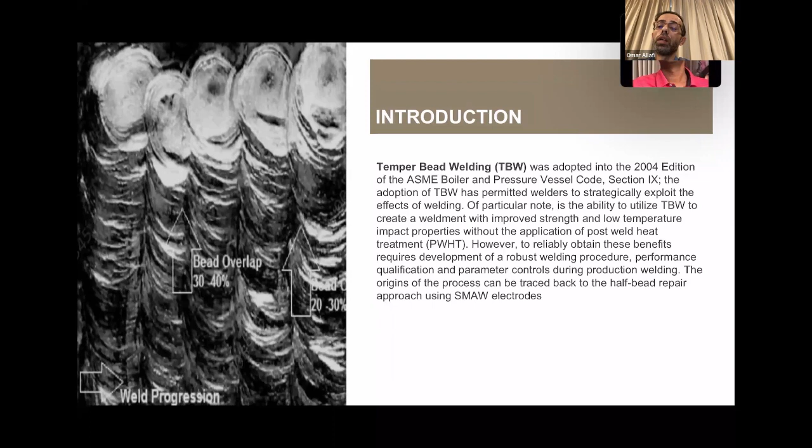As an introduction, the intent of temper bead is to control the mechanical properties of a weld joint and heat affected zone without the need for heat treatment. So it provides the same mechanical properties as heat treatment. This technique was adopted in 2004 in ASME Section 9, but that doesn't mean it was not in use long before this date. We have a record of using temper bead welding since the 1980s, especially in nuclear plants where accessibility is a concern. The first technique used in the 1980s was the half bead repair using SMAW electrode.

So how did it come to existence? If you look at the difference between single pass and multi-pass welding, we notice that residual stresses are much less in multi-pass welding than single pass. This is in part because the small welding filler size used in multi-pass joints will temper and normalize the weld and base metal, and also refine the grain size of the heat affected zone.

As you can see here, this is a weld joint welded using a small filler of 3.25 mm, and the white area is the recrystallized area, where this area is affected and tempered by the subsequent weld runs. But here, the white area is much less, so tempering and refining is not that effective.

In addition to this, the small electrode size will result in a smaller heat affected zone, as shown here. So this is how temper bead came to existence.

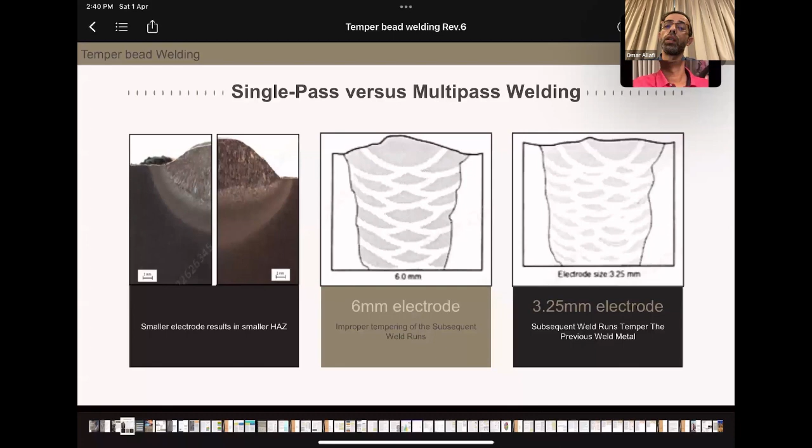So they asked: can we set forth critical parameters to control the mechanical properties by applying the subsequent run, ensuring that the hardness and toughness don't exceed the limits in the base metal? So this is where it started, and it started, as I said earlier, with the half bead approach.

So when it comes to PWHT, I always ask this question: what is wrong with PWHT? We don't tend to look for an alternative to PWHT when we are manufacturing or fabricating a new vessel. Yes, we don't do this.

So applying PWHT becomes a concern when you don't have time to do it. This is applicable when you are in a shutdown or a turnaround, or sometimes you don't have accessibility. So time here is the main concern. Give me time - all people in the inspection field or welding field know that if you give me time, I can give you everything. So the most critical factor that governs the repair methodology is time.

And we know that PWHT is time consuming. In addition to this, it's not always practical, and can itself result in distortion or reheat cracking. So if there is a way to ensure or adjust the mechanical properties of the base metal and heat affected zone without the need for PWHT, that would be great.

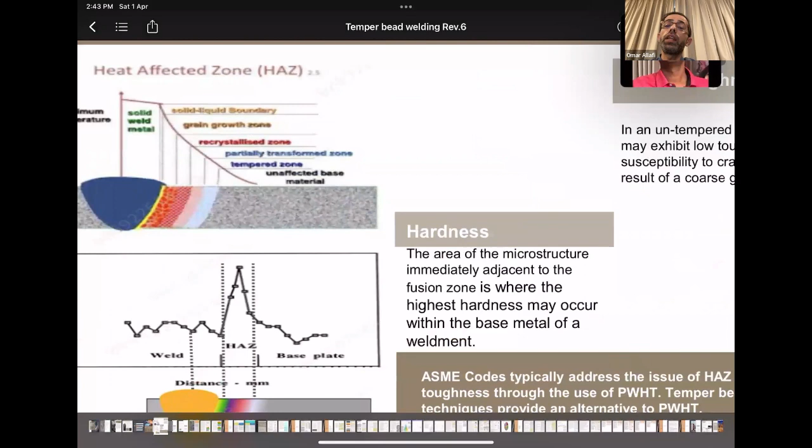It is clear in this graph that the coarsened grain area is adjacent to the fusion line of the weld because of welding. This is because it goes above the critical transformation temperature, and a phase change occurs from ferrite to austenite. Upon cooling, martensite will form, and upon heating, the grain size will enlarge. So this increase in grain size will affect the toughness, and the fast cooling or formation of martensite can result in high hardness values.

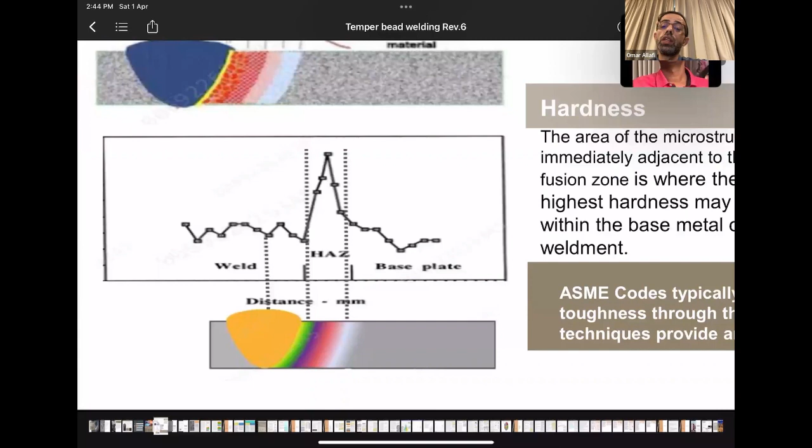As we can see here, this is where the maximum hardness can occur, just near the fusion line of the weld. So ASME codes address this issue and restore the mechanical properties through PWHT. So can temper bead do this? And the answer, as we'll see, is yes.

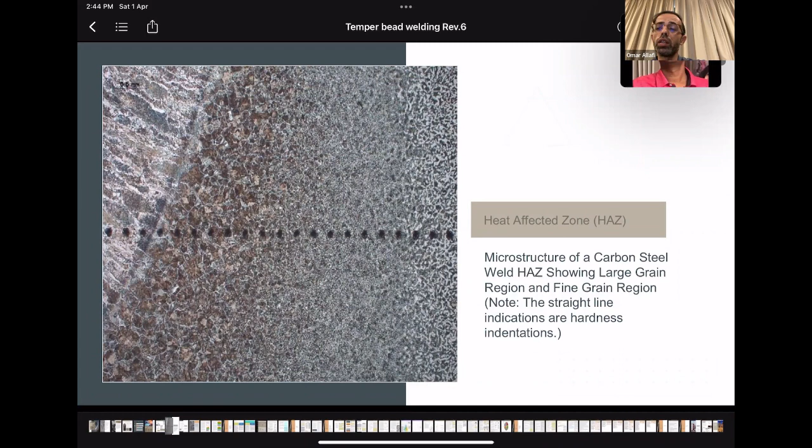This is another photo of the coarsened grain area. It is clear - this photo is for carbon steel welded using high heat input. So this is the reason why the grain gets coarsened or enlarged near the weld toe. And this dashed line is for the hardness indentation.

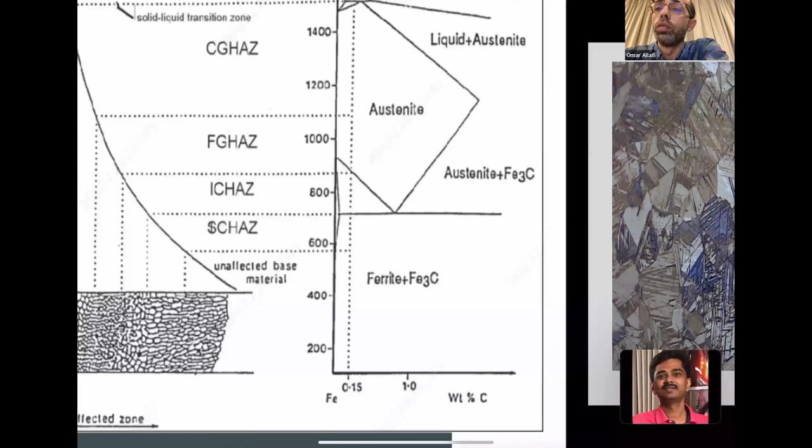Okay, so this is the relationship between the peak metal temperature of a weld and its correlation to the iron carbide phase diagram. In this area, this is where the grain gets coarsened, where you have enlargement in the grain size, because of heating during welding.

This is the fine grain heat affected zone. This is the intercritical, where the temperature goes up above the transformation temperature, or this line. This line here is referred to as AC1, the lower critical temperature, which is around 745 degrees Celsius.

So this area is where tempering occurs, where we get the mechanical properties restored. What we need to do is to make this area similar to the tempered area or subcritical heat affected zone, where the grain size is tempered, the toughness is restored, and hardness is similar to the unaffected base material.

Mr. Malge, can you please unmute yourself? Okay. Sorry for the disturbance, I'll just check on it. It's okay, it's fine. Even Omar, can you mute everyone? I don't know who's speaking, but it's okay, as long as you can hear me, it's fine.

So coming to the metallurgy of temper bead, the portion of the heat affected zone that exceeds the lower transformation temperature is subject to formation of non-equilibrium cooled microstructure upon cooling. So when you have slow cooling, this produces ferrite and carbide, which is fine and okay.

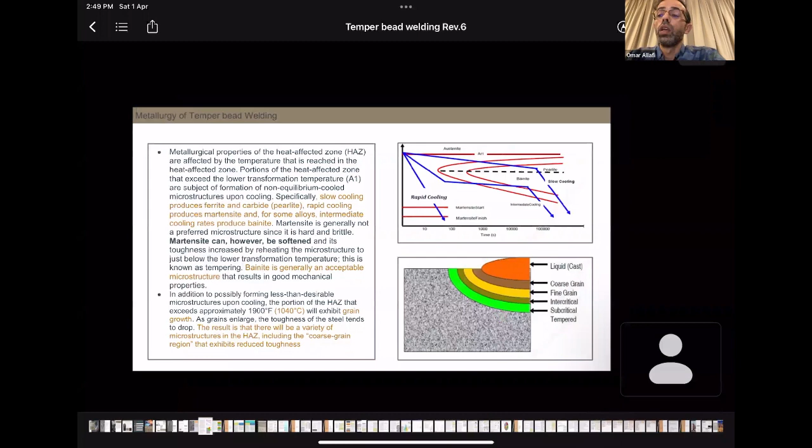So as I said, the essence of temper bead is to temper the previous weld by applying a new weld run, so you need an overlap. What we are doing is controlling some parameters when applying a weld run over a previous weld. This new weld run will temper the previous weld and the heat affected zone as well, so mechanical properties will be restored, hardness will be reduced, and toughness will be within acceptable limits.

Types of temper bead: as I said earlier, the first temper bead type used was half bead weld repair using SMAW. This technique was used by SMAW electrode. The procedure included preheating before grinding the defect or starting the welding, then grinding, then you use a small electrode for buttering the weld.

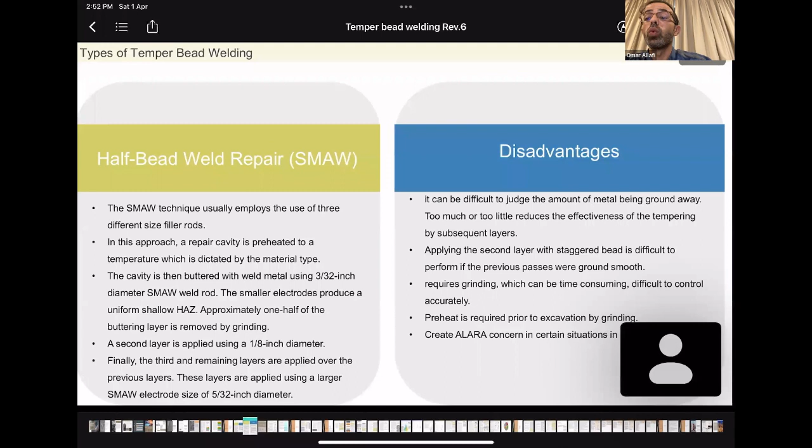Preheat is required to excavate by grinding. So before excavating the defect, you have to do preheat, and this creates an ALARA concern in certain situations, like in a nuclear plant. ALARA refers to as low as reasonably achievable. This is well known to all people dealing with radioactive sources or working in a nuclear plant.

So this will increase the exposure time to radiation when you are doing this much of grinding and for the weld beads you apply.

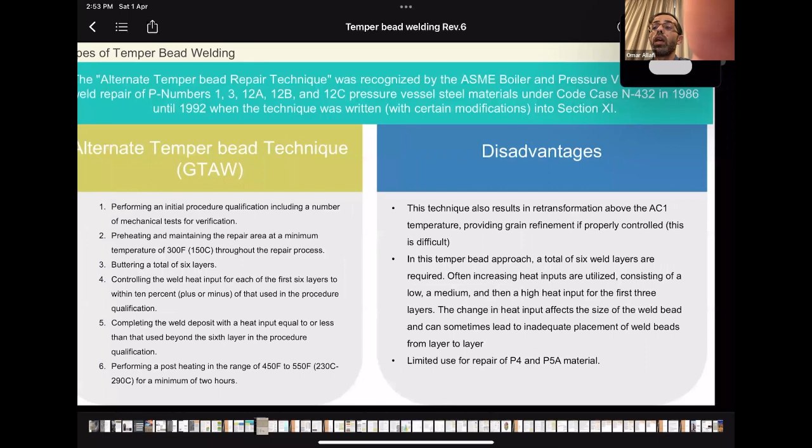And in 1986, a new temper bead technique was developed, which is the alternate temper bead repair technique. It was called alternate because it was an alternative to the well-known half bead technique. It was recognized by ASME through a code case for P number 1 and 3, 12A, 12B, and 12C under the code case N 432, from 1986 until 1992.

This technique was used extensively between 1986 and 1992 because there is no preheat used during the grinding, and there is no grinding of the weld bead, and requires less preheat during welding. So these are the main advantages of this technique.

You can apply it by preheating the repair area to 150, buttering a total of 6 layers. In each layer, you are increasing the heat input for the first three layers. You use a higher heat input in the second layer than the first one, and again a higher heat input for the third layer compared to the first and second layer.

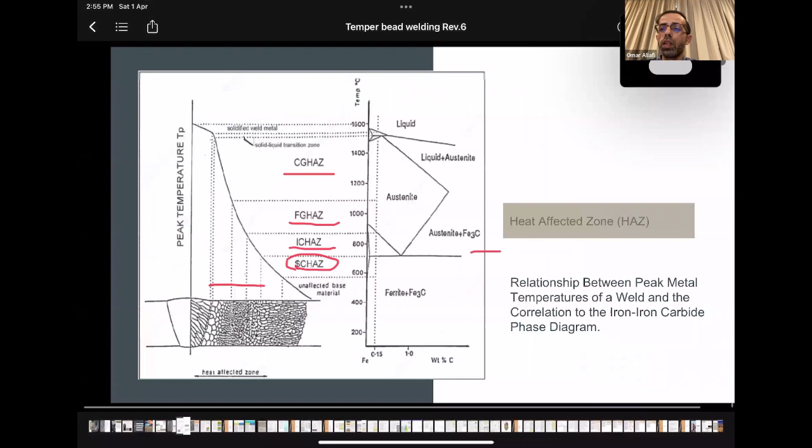This will result in increasing the temperature of the base metal above the lower critical temperature. This is AC1 - I can go back to the chart just to show you this is the temperature I'm talking about, the lower critical temperature. I'll be using this critical temperature in my presentation, and I'll refer to it as AC1 critical temperature.

This will take the base metal temperature above this lower critical temperature, and upon cooling, transformation to martensite and bainite will occur. This will enhance the toughness and reduce a little bit the hardness, but it's limited. It has limited use for P number 4 and P5A material, P11 and P22 material.

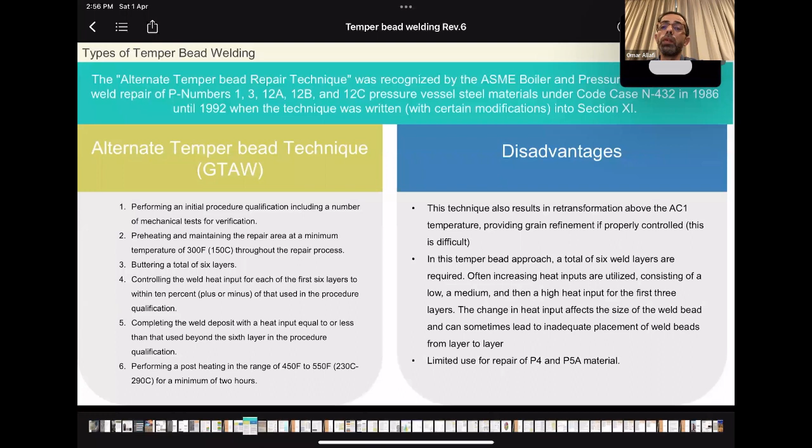So the main concern is that this technique results in retransformation above AC1.

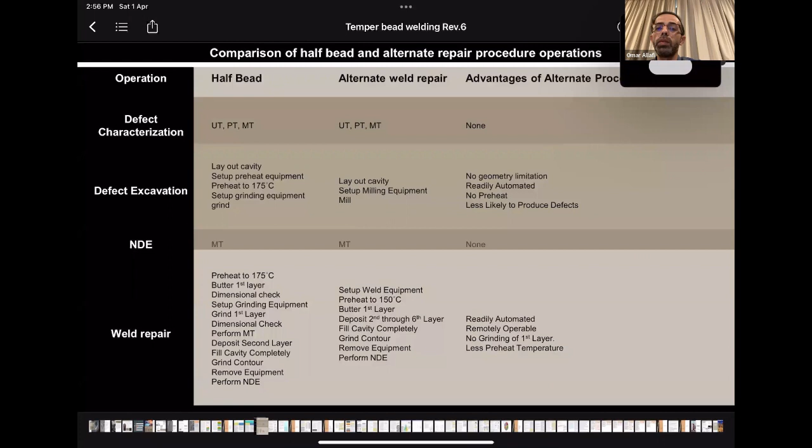This is a comparison between half bead and alternate repair procedure operation. As we can see, the advantages of alternate procedure over half bead procedure: no geometry limitation, readily automated. Of course, the technique used in this method is automatic GTAW or TIG welding, no preheat, and less likely to produce defects. So it is better than SMAW, and remotely operated, no grinding of the first layer, and less preheat temperature.

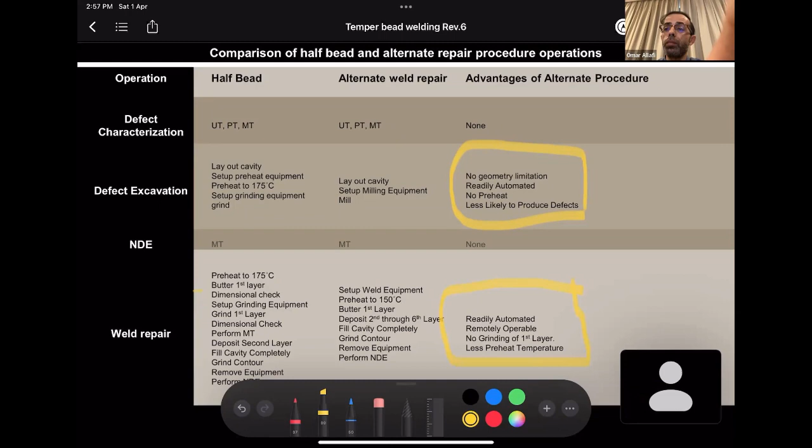Another technique was developed, which is the consistent layer temper bead technique using automated GTAW or manual SMAW. The good thing in this technique is that it doesn't take the base metal temperature above the lower critical temperature, which is AC1. So it is something similar to PWHT. It can restore the mechanical properties of the base metal.

Similar to PWHT. But as we can see here, when depositing the second weld layer, the fusion zone and heat-affected zone height of weld layer 2 is such that it is always less than the combined weld layer. So this is the weld bead, the weld layer of weld layer 2's fusion zone, and heat-affected zone height of weld layer 2 is always less than the combined weld layer.

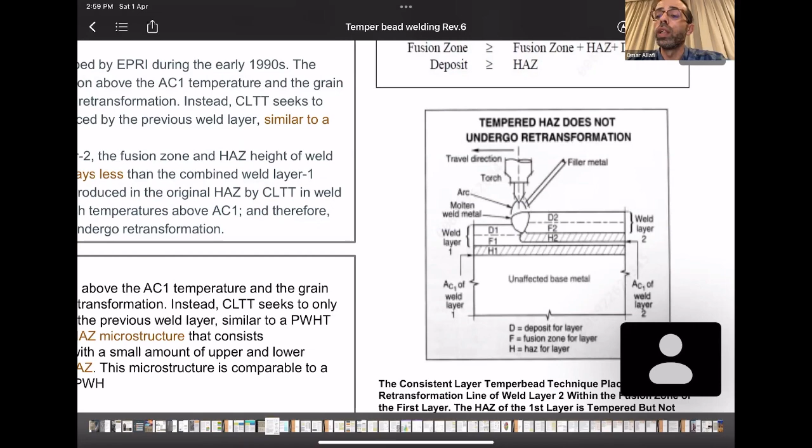So this is an overlapping - this is nothing but overlapping. This is how they control the tempering effect and control the mechanical properties of the base metal, by overlapping using, as I said, GTAW or SMAW. So the advantages of this technique are that it avoids transformation above AC1 temperature and produces a tempered microstructure similar to what is produced or achieved by PWHT.

Then the controlled deposition technique. This is one of the famous techniques that's still in use to this day. This can eliminate the coarse grain region within the HAZ where creep and reheat cracking have presented problems at elevated temperatures. So in this technique, again, you are controlling the heat input and heat input ratio, and you have an overlap percentage between the weld layers of 50% between the weld rings.

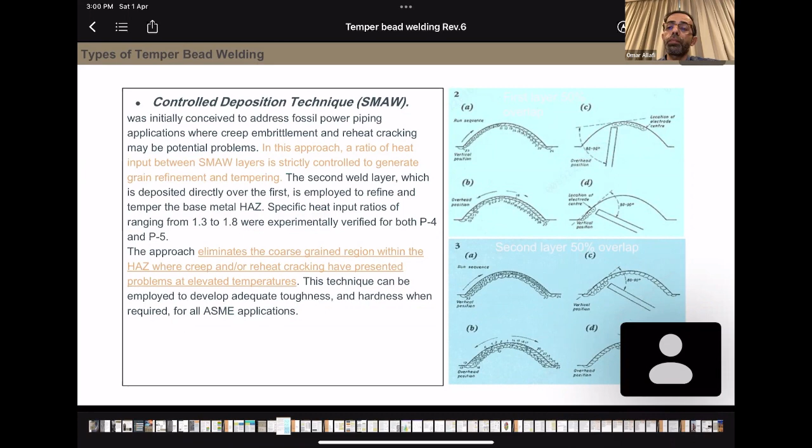So the differences between the current requirement and the requirements of the 2004 edition - we'll see how it was adopted for the first time in ASME Section 9 in 2004.

This is the famous table for temper bead, which is QW 290.4. This is where the essential variables are listed. And what I want to emphasize here is that these variables listed in this table apply in addition to the variables applicable for the processes qualified as given in QW 250.

What that means is that if you're using SMAW, for example, for temper bead, you have QW 250, the essential variables, supplementary essential variables in QW 250 - those variables are also applicable. So not only this table, and I'll explain why, and I'll show you why this is important. These essential variables, in addition to the essential variables in QW 250, are required and mandatory to be followed.

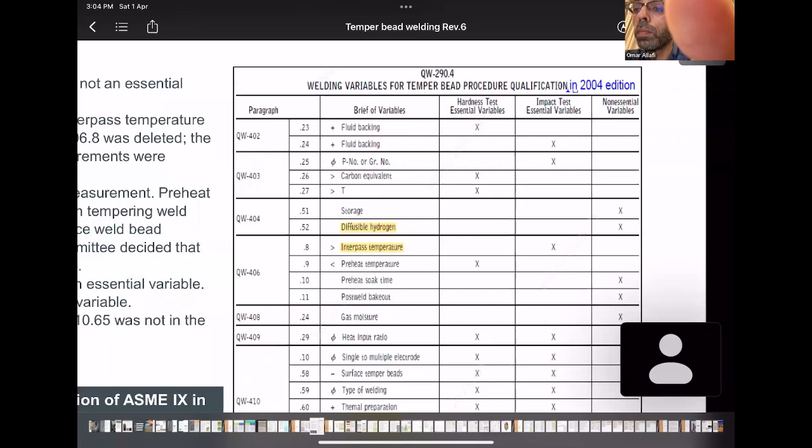Diffusible hydrogen was not an essential variable, as we can see, whereas it has become an essential variable in the 2021 edition.

And the other thing is the requirement for measuring interpass, as I said earlier, was deleted. Similar to interpass, the preheat temperature of each layer was also deleted. That doesn't mean, of course, that preheat is not required, but there was an additional requirement to control the preheat of each pass. So this was deleted.

Surface bead placement was not an essential variable. Grinding requirement was not an essential variable. Which means that if the WPS was qualified for half bead technique, you could use it for full bead technique. So now this is not possible.

In the current edition, and grinding requirement was not in the table. So this grinding, it's not that it was not an essential variable, it was just not considered in the table. But there was a note when they shared this or adopted this: the committee of ASME Section 9, the subcommittee, was considering imposing surface bead, bead overlap, and grinding as essential variables in the next edition. And they were added in the 2006 edition.

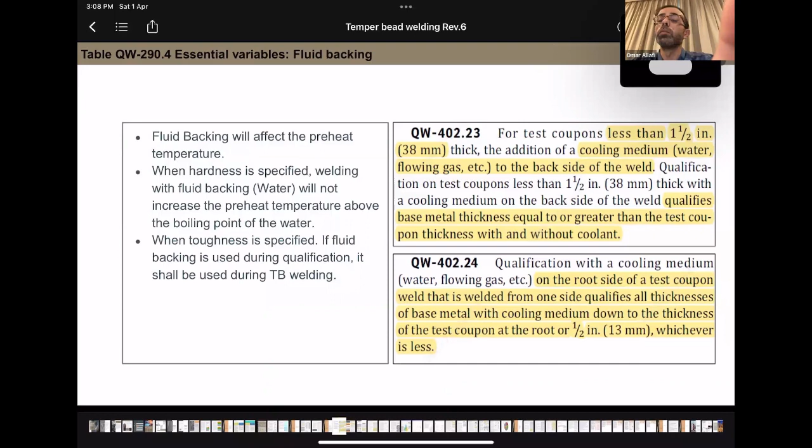So when you qualify using a cooling medium, you can be qualified for welding without a cooling medium. It's exactly the opposite when it comes to toughness. On the other side, when you are qualified by a cooling medium, you cannot do the welding without a cooling medium for that WPS.

Another essential variable is grinding. What they mean here by grinding doesn't mean that sometimes you apply the first bead and you need to do grinding or remove some surface flaws or minor flaws - that doesn't mean it's not allowed. But grinding means use or non-use of the half bead technique. So if the test coupon was qualified using grinding or the half bead technique, you cannot use the same WPS for the full bead technique.

So the thickness, this is an essential variable to hardness, not to toughness, by the way. So the maximum thickness qualified is the thickness of the test coupon, or it is unlimited if the test coupon is greater than 38.

So what we can see is that when you are welding a test coupon, your thickness is usually the maximum thickness you can use for temper bead. But when it comes to toughness, reduction of the thickness is not allowed, or there is an additional requirement for reducing the thickness to control the toughness.

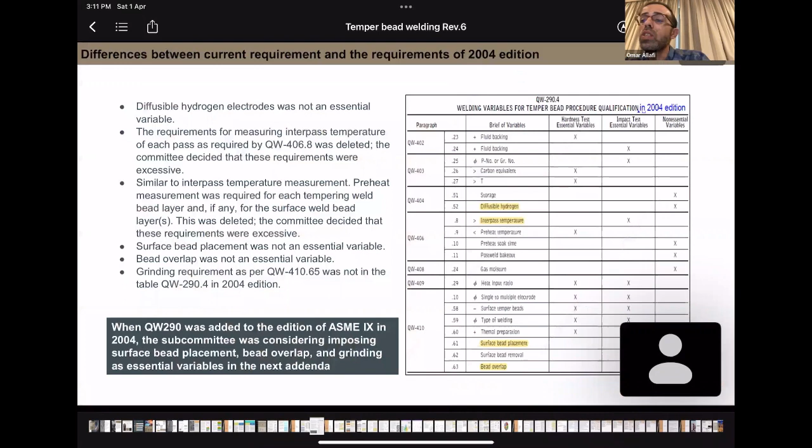This is why I would like to go here. This is why you have 3 columns: column A, column B, and column C. So what you need to know is what actually you are controlling in your welding. Is it hardness? Is it toughness? Or none of them?

So when hardness or toughness is specified in the original construction code, you have to follow column B. When it's not, and hardness is specified, you can choose column A. When none of them is specified, you can use column C.

But in this case, what you need to do, what kind of tests are required when following column C? It is the same requirement as the normal weld, which is QW451, the bend test and the tensile test. But for column B and column A, the required tests are the bend test in addition to the toughness or hardness.

So single or multiple electrode, this is a change from single electrode to multiple electrode or vice versa. When you change, you need requalification.

Surface temper bead: the deletion of surface temper bead, or change from surface temper bead that covers the full surface to that only deposited along the toes of the weld. So sometimes the placement of temper bead is placed over the full surface of the weld, or sometimes it is placed near the toes of the weld to temper this area, the heat affected zone.

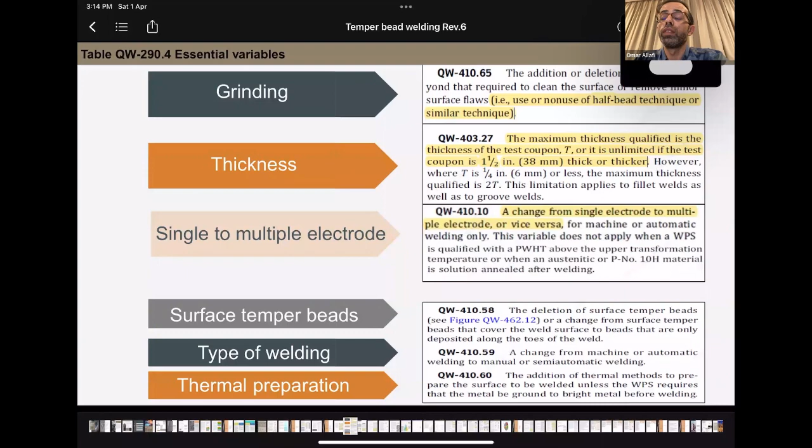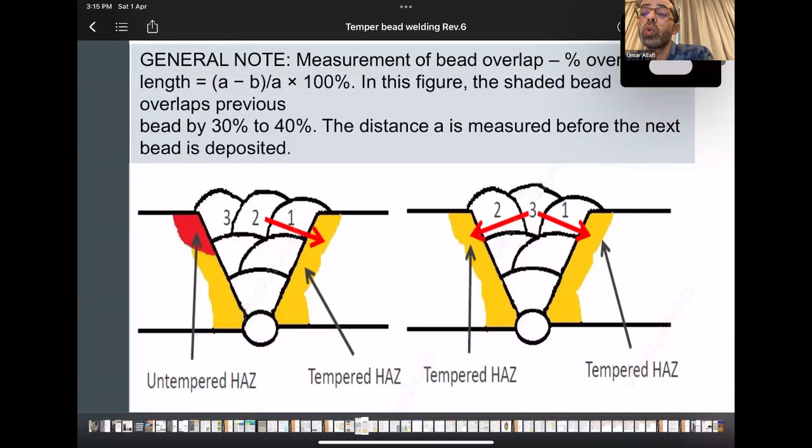But when it is done improperly, like the figure on the left side, the red zone is an untempered zone. So the sequence should be similar to this: 1, 2, and 3. And 3 is supposed to temper the heat affected zone of weld run number 1 and number 2.

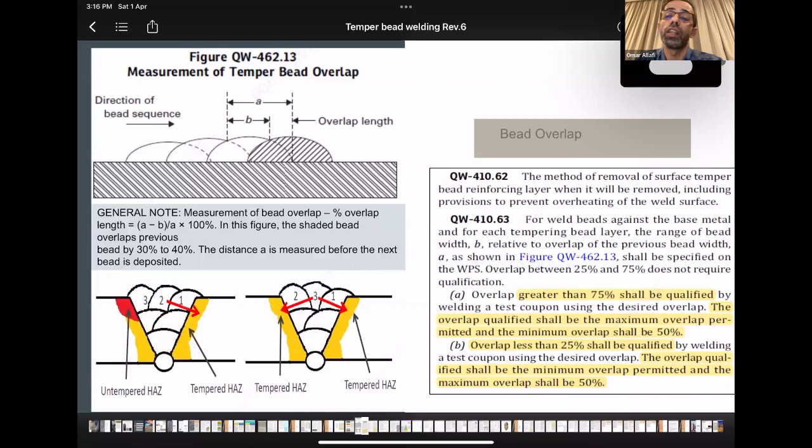And this is where skill and experience is required. This is why temper bead is very difficult. You don't need only a competent and skilled welder, but you need also experienced welders who have experience in temper bead technique.

So for the qualification, when you want to have an overlap greater than 75, what you should do now - let's say that I want to have an overlap of 80%. So now you have to...

Make an overlap of 80% in the test coupon, but that will change the minimum overlap, so it will not be within the range of 25 to 75. Now your new overlap value, which is 80, is the maximum, and the minimum is 50.

Similarly, when you are using a lesser overlap value, like less than 25, you need to have a new test coupon that matches the new overlap value. Let's say that it's 20, and your maximum overlap in this case will become 50%.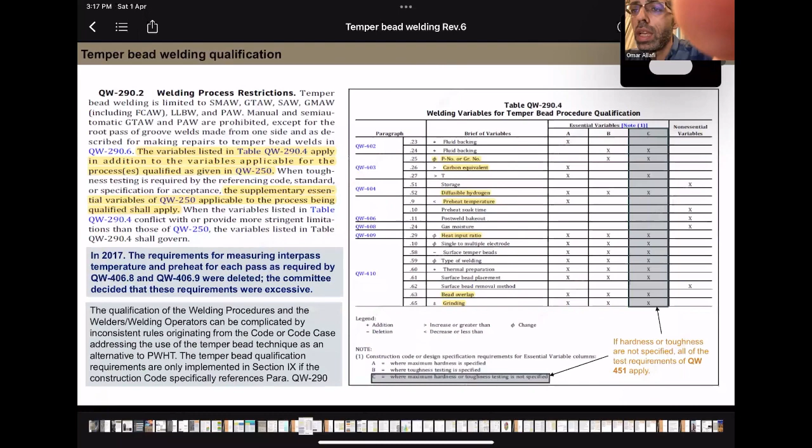P number: so I'll just go quickly and refer to this table. As you can see here, P number and group number are only essential variables when toughness is required. For column B, when toughness is required, and it is not required for hardness.

So does that mean that when hardness is specified for temper bead, the P number is not a factor? I mean, does that mean that if I qualify P22 material, I can use the same WPS for P11 and carbon half moly and normal carbon steel? The answer is no, simply because, as I said earlier, these variables listed apply in addition to the variables of QW-250.

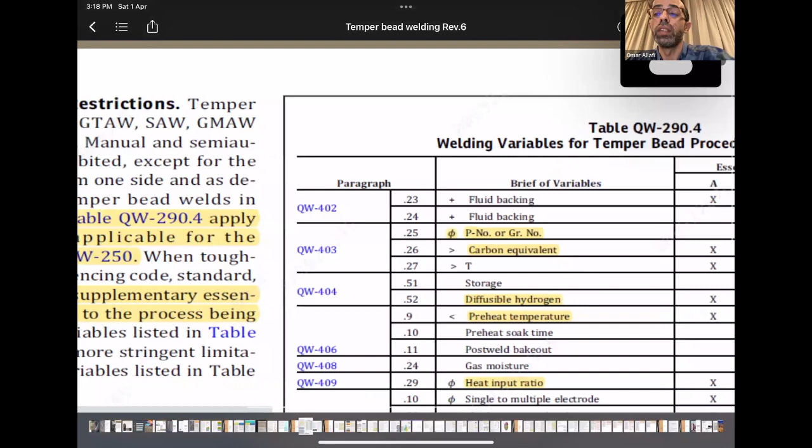So I'm giving this example just to emphasize that although it is not an essential variable here, it is an essential variable in the original or basic WPS qualification in QW-250. And that's why that doesn't mean that you can use this technique for different P numbers.

So another factor - I'll go back to P number.

And when impact testing is required, it is not only the P number that is essential, but also the group number. Group number is also a critical variable when toughness test is specified, as different groups might have different chemical composition, and this will change the toughness properties or austenitic transformation temperature.

Just a note here for P numbers: for some materials, the P number was changed in 2010. So when you refer to an old WPS, you might find that the P number is different.

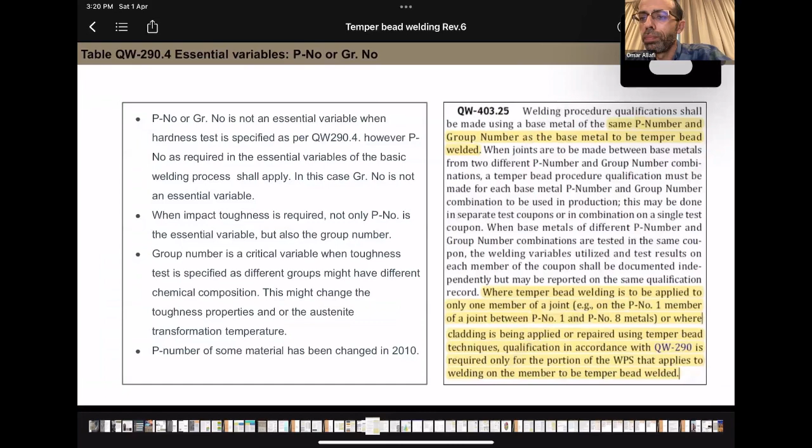Another point here: temper bead welding can be applied to only one member of a joint, like in case of cladding, or when you have a dissimilar weld joint, like carbon steel to stainless steel, and you apply a buttering of 309 on the carbon steel side, and this requires PWHT as per the specification. So you can use the temper bead for this joint only, and for this part of welding only, for buttering 309 filler to the carbon steel, and the subsequent welding will be done normally without temper bead.

Carbon equivalent is also an essential variable when hardness is specified. So for the carbon equivalent, we don't refer to any normal chemical composition specified in ASME section 2A, for example. You need to have an actual composition of all elements specified in the carbon equivalent equation. You have different carbon equivalent formulas, and all of them are accepted, but you need the actual composition.

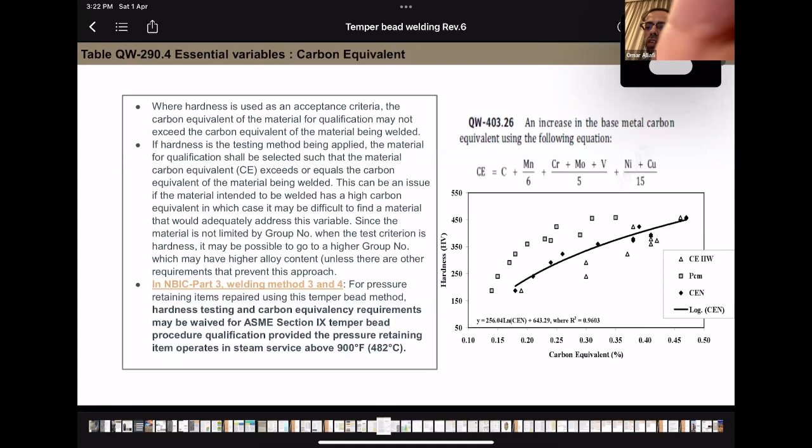And again, this is an essential variable only when hardness is specified. As we can see in this chart, carbon equivalent can affect the hardness values. So the higher the carbon equivalent, the higher the hardness you will get after welding.

And diffusible hydrogen is another concern. This is also an essential variable for both toughness and hardness. So an increase in diffusible hydrogen will require requalification. What do we mean by diffusible hydrogen? We have a hydrogen designator in the electrode specification or number, and these numbers are given in table 8 of ASME section 2 part C.

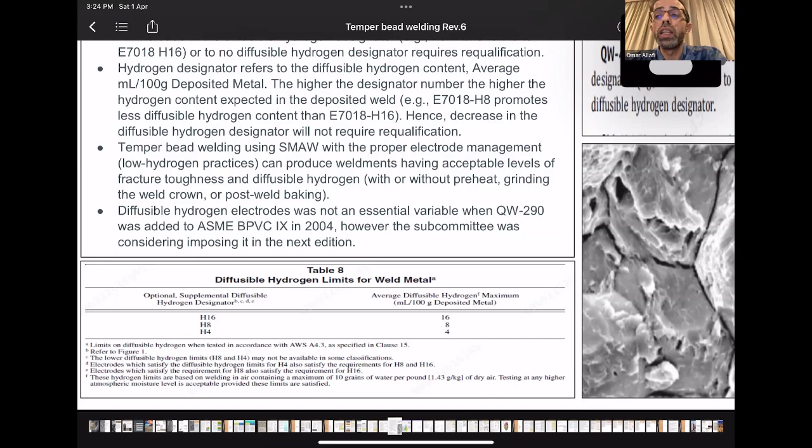As we can see here, H16 is the average diffusible hydrogen expected in the deposited weld, in milliliters per 100 grams of deposited weld - this is 16. So the higher the value, the higher the expected hydrogen content in the deposited weld. So increasing the diffusible hydrogen designator requires qualification, whereas reducing it doesn't require any qualification.

So if the WPS is qualified using H8 hydrogen diffusible designator, you can use H4 without requalification, but you cannot use H16 without qualification. Why is diffusible hydrogen important? Because it is, of course, a prevention against hydrogen induced cracking.

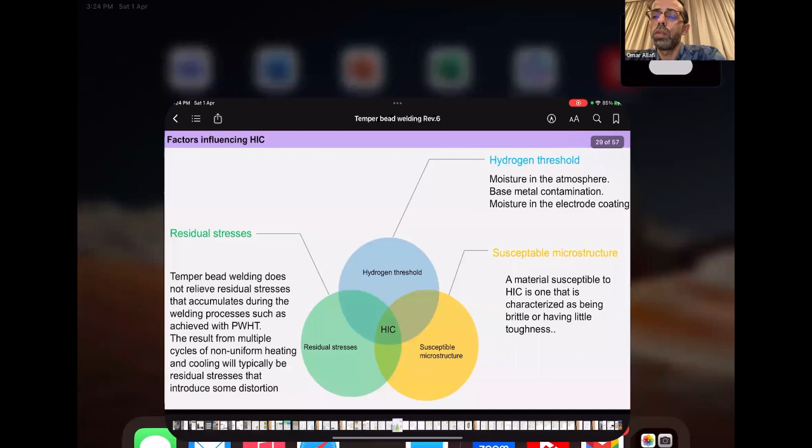So hydrogen induced cracking, as we know... can you see my screen now? Hello? Yes, it is clear. Yes. Oh, okay. Okay, sorry.

Hydrogen-induced cracking can be affected by 3 factors: the hydrogen threshold, residual stresses, and susceptible microstructure. So the diffusible hydrogen in the electrode, any moisture in the atmosphere or base metal contamination, or moisture in the electrode coating, can increase the hydrogen content and can increase the likelihood or probability of having hydrogen-induced cracking. Also, the residual stresses.

What I'm trying to say is that temper bead is not intended to relieve residual stresses, but to control mechanical properties. So the residual stresses after temper bead are always there - you have residual stresses, yes, less than normal welding, but you still have residual stresses.

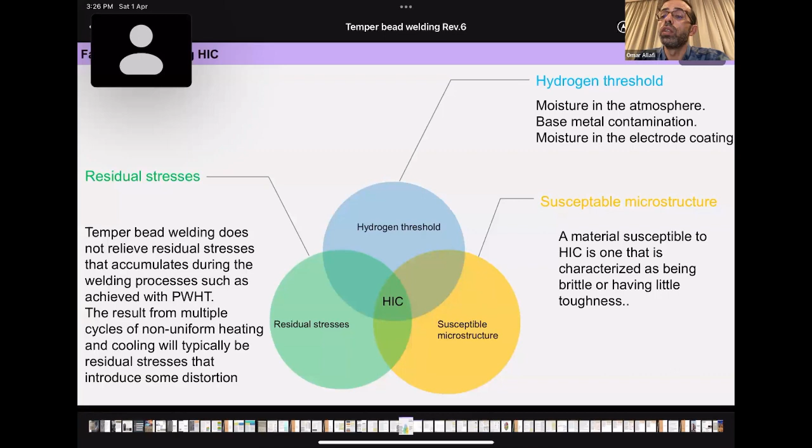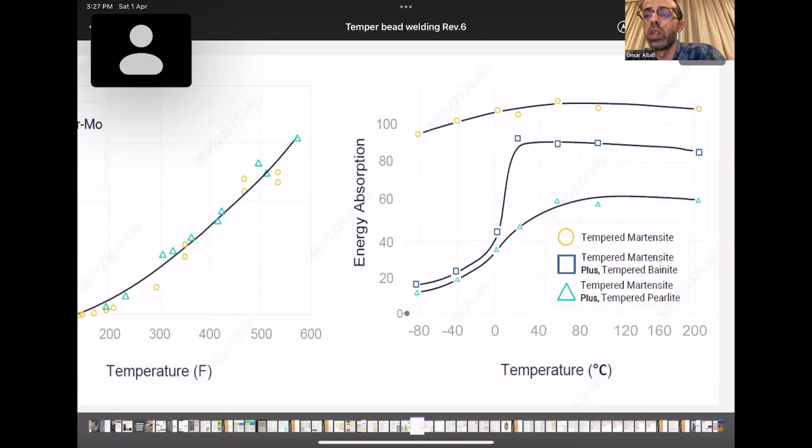This is for tempered material. But when the material is untempered, you will not have the same values. So this might also increase the chances of having hydrogen-induced cracking.

Preheat is good for hardness and not good for controlling toughness. So preheat temperature is an essential variable when hardness is specified. That's why it is an essential variable for method A, which is hardness. So slower cooling rate results after higher preheating temperature — when you start with a higher temperature, the cooling rate will be slower. Why? Because it lowers the thermal conductivity of iron and steel.

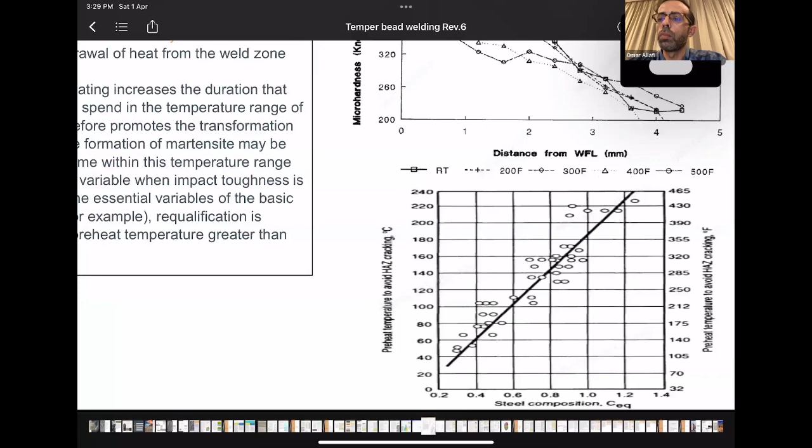In this chart, you can see how steel composition and carbon equivalent relate to what preheat temperature is required for any carbon equivalent. This is, of course, again because it is required when hardness is specified. So the preheat temperature can be estimated for a steel material using this chart.

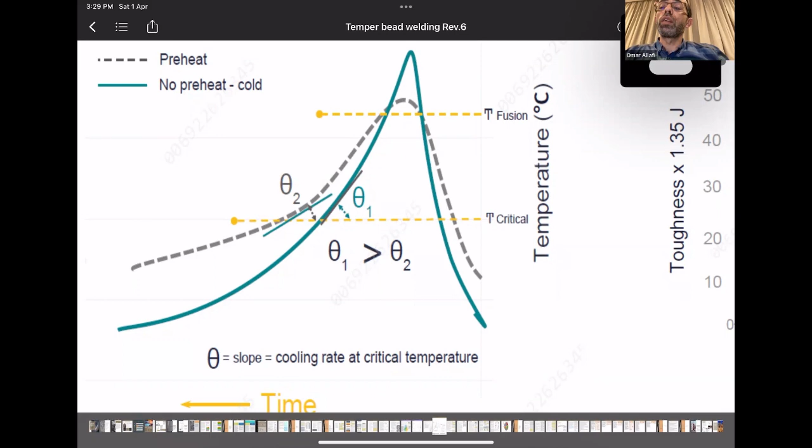And these charts can show how the cooling rate will be lower when preheat is used. In this chart, you can see you have a faster cooling without preheat, but when you preheat the joint, the cooling rate will be slower. So this will impact the toughness, as we can see here with 260 degrees Celsius, how the toughness is impacted, whereas at 93 it is a little bit higher, and without preheat it is also higher. So there is an adverse impact of preheat on the toughness of the base metal.

The heat input ratio — this is where I want to cover the point of using automatic GTAW. What do we mean by heat input ratio? This term is only related to temper bead. So in basic welding qualification or essential variables for any method, you won't see this variable listed, because it is only related to temper bead. So what we have is a heat input ratio between any weld and the subsequent weld run, and normally it is 1.3 to 1.8, developed and proven for P4 and P5A material to control the hardness and toughness of the weld.

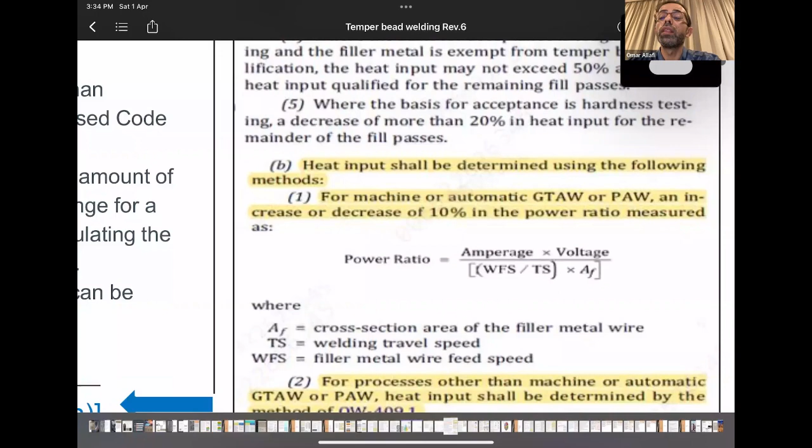So to address this, a new terminology was developed, which is the power ratio. In the power ratio, we consider the cross section of the filler wire and the filler wire feed speed — it depends on the feed rate of the filler wire and the filler wire cross section. So this power ratio is used to control the heat input ratio when using GTAW techniques. The automated process is a lot better at controlling the heat input or power ratio than the manual technique, and that's the reason why it is preferred. There is an additional requirement for using manual GTAW for temper bead as specified in Section 9.

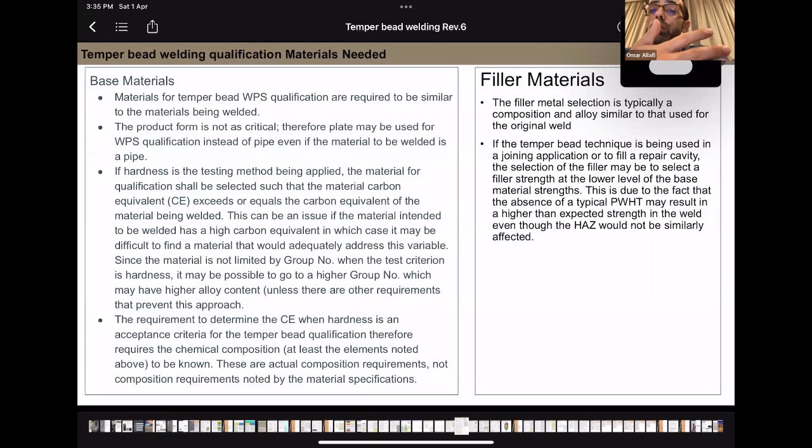Okay, so for temper bead qualification, the material should be similar and we should have the same WPS. The product form is not critical—the plate may be used for WPS or pipe.

If hardness is specified, then you have a carbon equivalent, and this carbon equivalent might cause a problem when selecting a piece for a test coupon, because you need a higher carbon equivalent value. But this can be resolved by changing the group number. In the case of hardness, the group number is not an essential variable, so you can change it and select a test coupon with higher carbon equivalent to qualify your WPS.

The filler wire typically should match the composition of the original weld, but some studies claim that using a filler wire with lower strength is preferred. This is due to the fact that the absence of typical PWHT might result in higher than expected strength.

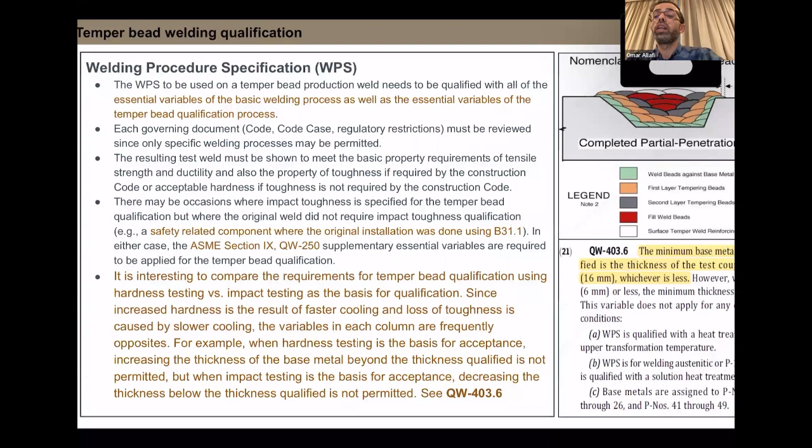In temper bead procedure qualification, I'll talk about the last paragraph, which is how the requirement of temper bead using hardness versus impact testing as the basis can change everything. For example, taking thickness as an example: increasing the thickness is not okay, but reducing the thickness is allowed for hardness, while for impact testing it is different.

Decreasing the thickness below the thickness qualified is not permitted. I'm referring to paragraph 403: the minimum base metal thickness is the thickness of the test coupon, or 16 mm, whichever is less.

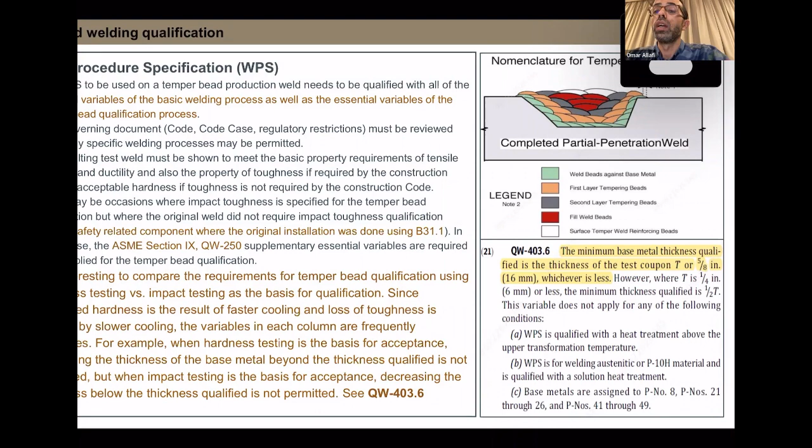In some cases, like in B31.1, you have a safety concern in occasions where impact testing is specified for temper bead, but where the original weld did not require an impact testing qualification. There is a note in B31.1 where some material at low temperature might change or reduce the impact toughness properties, and this is the reason why sometimes we need to do the temper bead using impact toughness testing.

So sometimes you find that it is specified to follow this method, impact toughness, although it is not required by the construction code. But because sometimes the impact toughness at room temperature might decrease when welding using temper bead, you need to follow column B or the toughness method as a requirement—you need to satisfy all requirements for toughness.

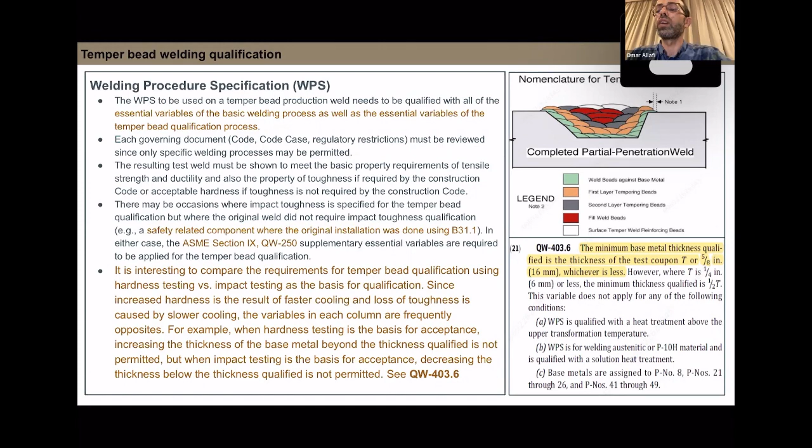Qualification of welders: as I said, this technique depends mainly on the competency and experience of the welder. As I explained earlier, how overlap can result in untempered HAZ.

Here I would like to cover that the continuity of qualification in accordance with QW-322 shall be followed when using manual welding. Note that the 6-month rule for continuity is applied where repair of temper bead is done using manual or semi-automatic GTAW or PAW. So when you are using manual or semi-automatic GTAW, the 6-month rule applies, and you need to have a proficiency demonstration for all welders using manual or semi-automatic GTAW or PAW.

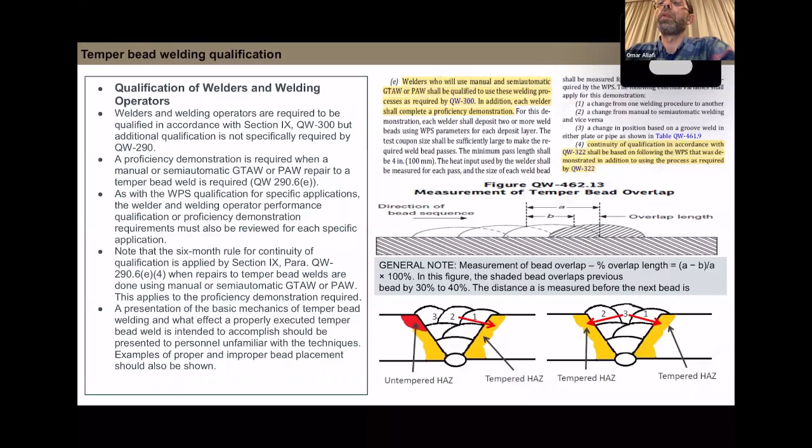This is the temper bead qualification nomenclature of temper bead welding in ASME Section 9—you can use any groove shown here to qualify your WPS.

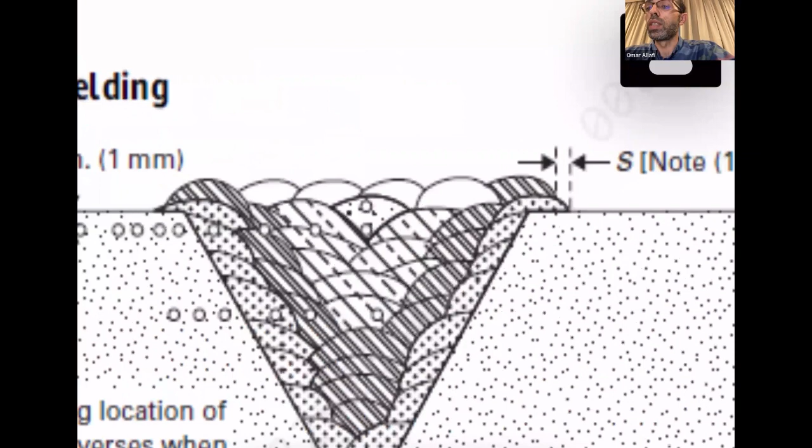The temper bead placement, or the distance S between the temper bead or the surface temper bead, is usually in the range of 2 to 4. When you change this within 1.5, it is acceptable—this is the limit for this distance, usually for the surface timber bead placement.

We are adding this to temper the subsequent weld, and sometimes it can be removed—the surface temper bead can be removed. Removal of the surface temper bead is not an essential variable, but it is required in some codes and standards. This distance, within 1.5, requires no qualification, but usually it should be between 2 to 4 mm.

So these are the factors affecting the repair rates, and as we can see, welder skill matters. Why am I talking about competency of welders? Because 27% of weld failures are attributed to welder skill or poor workmanship in preparation for the welding. So welder competency here again is very important when it comes to temper bead.

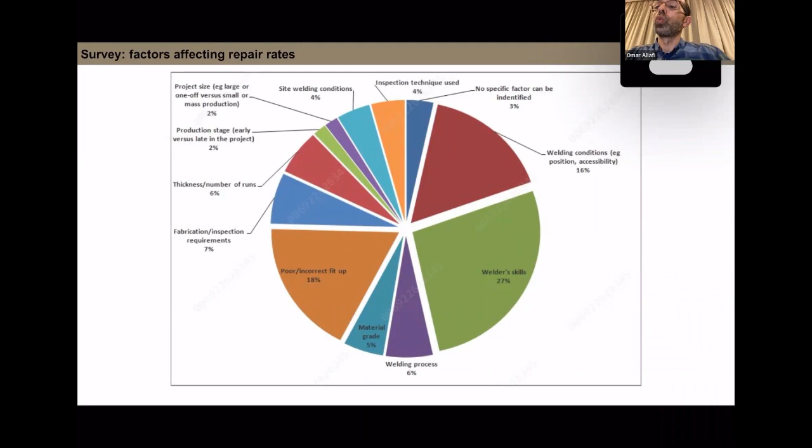Codes and standards, and I will start with Section 3. In Section 3, the only method recognized by ASME Section 3 was the half bead, but in 2021 they changed and they're accepting both half bead and full bead.

So here, the total depth shall not exceed one-third of the full thickness. Post-weld bake out is required, although H4 diffusible hydrogen designation is mandated. So they're mandating using H4 hydrogen designator, and they're mandating the post-weld bake out to reduce the likelihood of hydrogen-induced cracking. This post-weld bake out is a non-essential variable in QW 290.4.

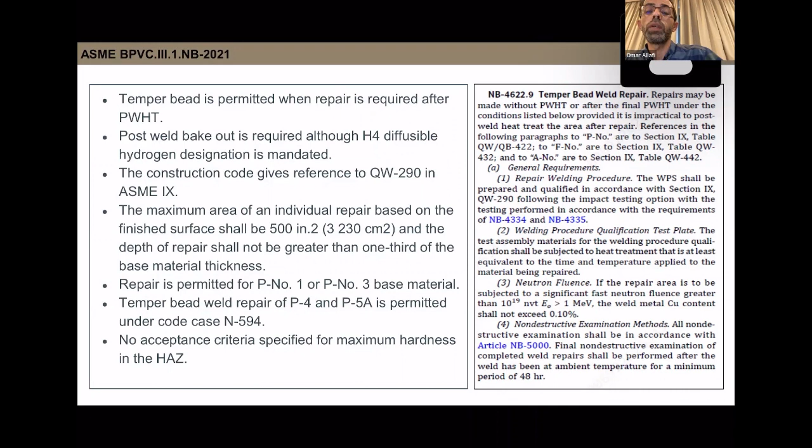No acceptance criteria specified for maximum hardness in the HAZ. In ASME Section 1, only half bead is allowed.

The permitted materials are P number 3 group 1, and P number 1 and P number 3 group 1, 2 and 3, and the permitted welding processes are SMAW, GTAW, GMAW, including FCAW, PAW, and SAW. Although SAW is one of the accepted methods in ASME Section 9, it is only acceptable in ASME Section 8 Division 1. So they have a preheat requirement of 175. Interpass is an essential variable here, and post-weld bake out is also required.

The final temper bead reinforcement shall be removed. It is an essential variable here. No reference is given to QW290 in ASME Section 9. So they're accepting this technique, but they are not giving any reference to ASME Section 9. No maximum hardness value is specified, and no requirement for impact toughness is specified.

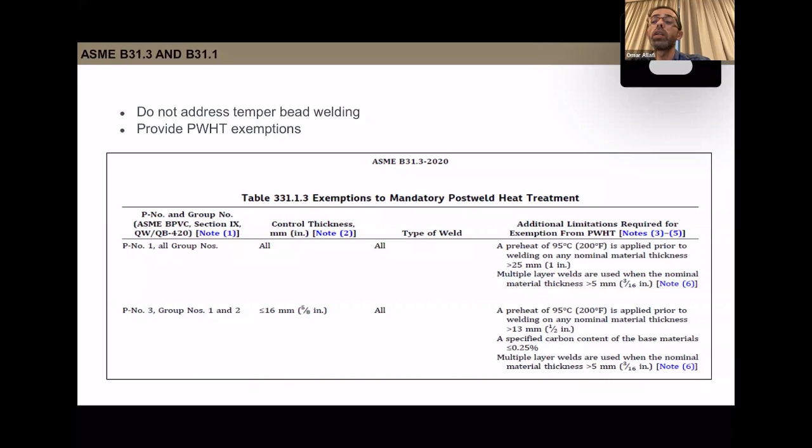In B31.3 and B31.1, they do not address temper bead welding. They provide PWHT exemption by preheat. In PCC2, it is a non-construction code, but it provides a method of repair of equipment, and gives the option to use temper bead when repairing carbon steel pressure components, or pipeline having carbon equivalent greater than 0.45. No acceptance criteria also for hardness.

It gives reference to Section 9 when requirement of temper bead is not specified in the construction code. In API 510, this is controlled deposition welding. This is applicable for P number 1, P number 3, and P number 4. The permitted welding processes are SMAW, GMAW, GTAW. It doesn't specify whether it's manual or automatic.

They're accepting full bead and half bead. Diffusible hydrogen is H8. Post-weld bake out is required and can be omitted when using H4 hydrogen designated electrodes. When shielding gas is required, the gas shall exhibit a dew point no higher than -50. This is for GTAW. No reference is given to QW290.

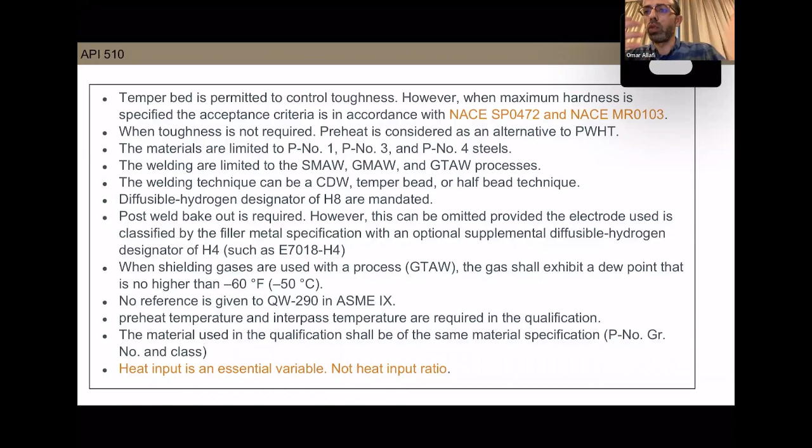Preheat temperature and interpass temperature are required in the qualification. The material used shall be the same material specification, P number as well as group number. So heat input is an essential variable, not heat input ratio. What they are doing is controlling the heat input of each layer to be as per the WPS qualification. But since they are not given a requirement or reference to QW290, you cannot ensure that you are controlling the heat input ratio, because they don't give a reference to QW290 for temper bead welding.

For NBIC Part 3, we have 7 methods. Methods 2 through 5 are for temper bead, and the last 2 methods are for controlled deposition. In each method, I listed down all the materials permitted and the chemical composition of this material. In weld method number 2, this is when impact testing is specified.

So they have an additional requirement for shield gases. This is the moisture requirement in QW290.4, which is non-essential variable there, but they're making it essential here. Full thickness is permitted only for P4 and P5A material.

It's not permitted, or permitted under certain conditions, when it is a tube-to-header joint with full penetration, and volumetric examination is done after welding. The reason is that they don't want to permit this technique for all weld joints. They specified using full penetration or full thickness repair for P4 and P5A, limiting the use of this technique only to tube-to-header joints. The welding methods are SMAW, GMAW, FCAW, GTAW, and they give reference to QW 290.

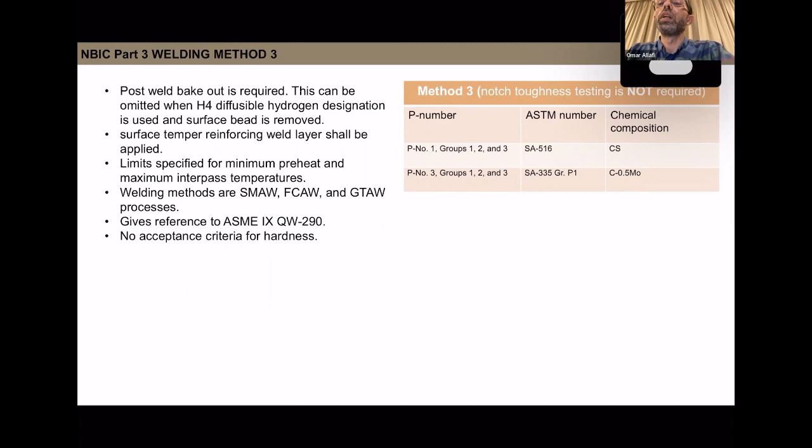Welding methods SMAW, FCAW, GTAW process give reference to QW-290. Method 4 is mainly for P number 4 and P number 5A, without impact toughness. So yes, give reference to 290, and again, full thickness repair similar to method number 2 is permitted for tube to tube header joint. Post-weld bake out is required and can be omitted when using H4, and the surface bead is removed.

Welding method number 5 is for the dissimilar welding. The P numbers listed here are for the base metal, and can be welded to P number 8 or like 300 series stainless steel or any nickel alloy P number 42, 43, and 45. So this is for the dissimilar.

When the construction code specifies toughness, you should go to method 2. When it doesn't specify toughness, you can go to method 3 or 4.

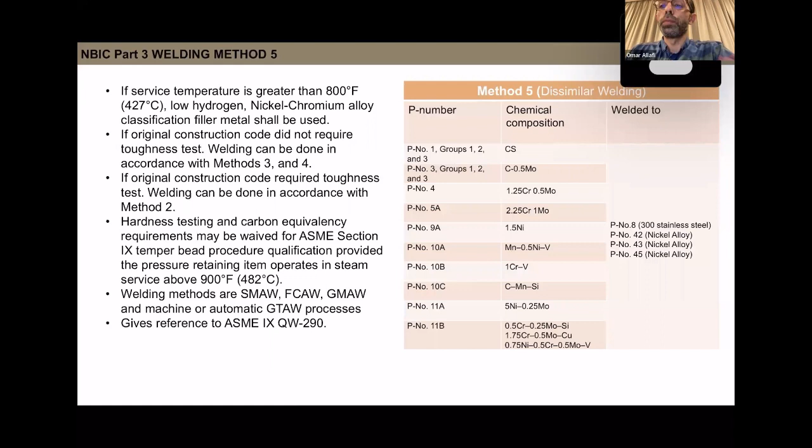Number 6 is using austenitic for the dissimilar weld or for P91 material. For P91 material, the 9 chrome 1 moly, using controlled deposition. This is limited to butt weld in tubing 5 inch or less diameter.

Stringer beads are only permitted. Limits are specified for minimum preheat and maximum interpass value. Welding methods are SMAW or GTAW process, manual or automatic.

So for joining P number 15E group 1 to P number 5A, martensitic filler is to be used. And for joining P number 1 to P number 8 or P number 42, austenitic nickel base filler is to be used.

And this welding method is also for 9 chrome material welded to 5A or P8 or P42. This is also limited to tube to tube header where the tubes are 5 inches or less. Again, stringer bead is only permitted. Minimum preheat and maximum interpass temperature are specified.

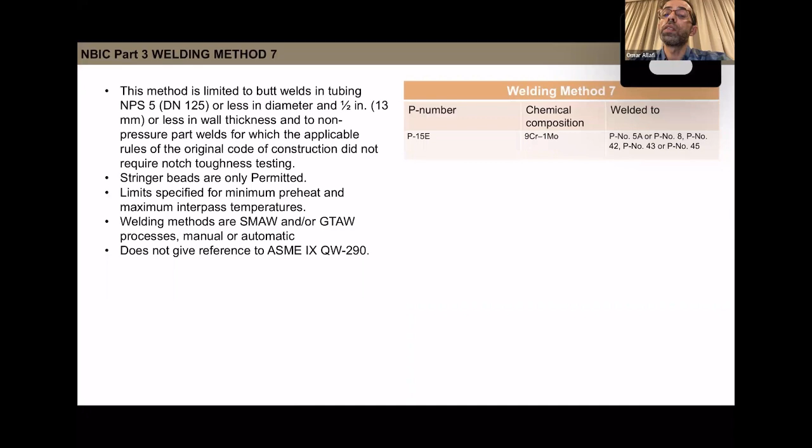Now consider P91 material. In the repair of service exposed P91 material, we know that the strength can be degraded. So in this case, some studies claim that the application of weaker filler metal to more closely match the strength of the material after exposure to high temperature during service can be used.

But this is not the case in NBIC method 6 and method 7. They mandate using matching filler wire, which is B9. So it is critical also that preheat and interpass temperature be lower than the martensitic formation temperature. This material is martensitic steel.

So normally during welding, what you are doing is you preheat, you weld, then you apply post heating, then you cool it down before doing PWHT. Why do we cool it down? To ensure that the martensite is fully transformed before doing PWHT. So this is critical, that's why you need to keep the preheat below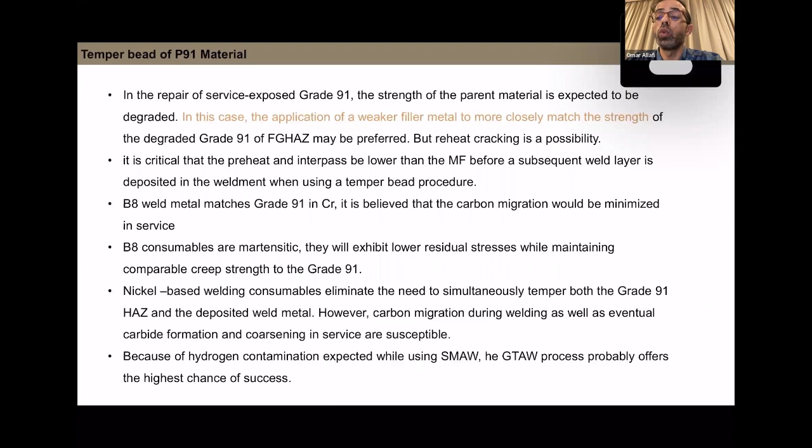Because of the hydrogen contamination expected while using SMAW and GTAW processes, compared to using SMAW, the GTAW process offers the highest chance for success. So here you have less hydrogen in the GTAW process.

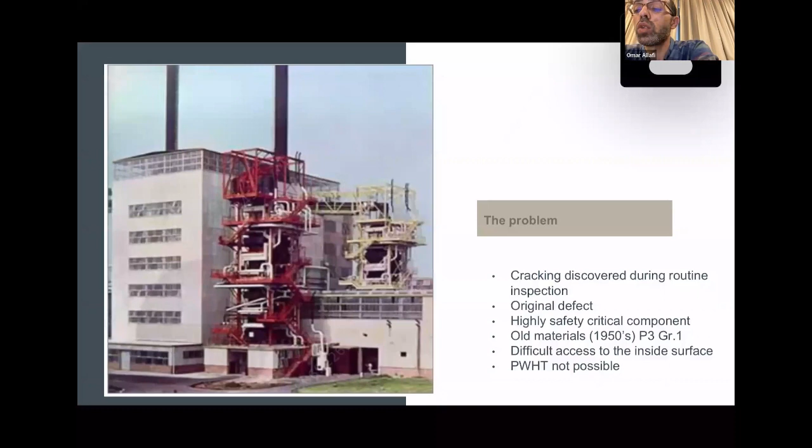The temper bead welding case study: I will share one case study where cracking was discovered during routine inspection. This is inside a steam drum.

The material was old, from the 1950s, difficult to access on the inside surface, and PWHT was not practical. So what they did is remove the defect, prepare the cavity by machining, and install the backing plate and runoff plate. They controlled the deposition using SMAW weld repair.

Then they removed the backing plate and runoff plates. They qualified the test coupon. This is the test coupon qualified, and this is the geometry of the weld.

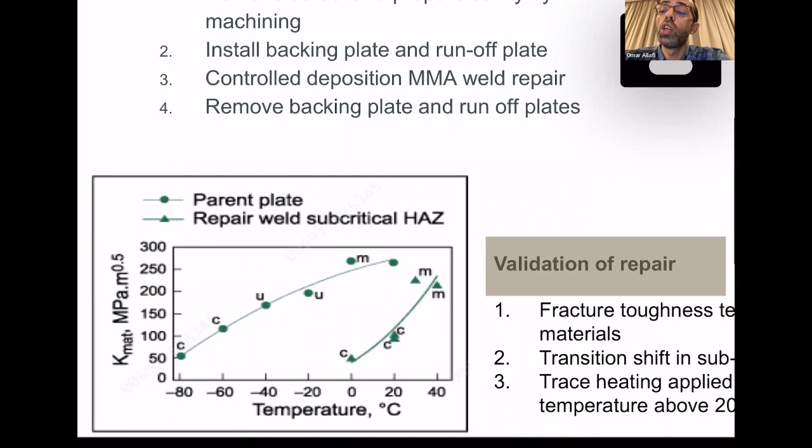In terms of fracture toughness, the fracture toughness was slightly changed. As we can see here, the toughness of the weld has changed, so it has lower toughness at lower temperature. So what they did is they provided steam tracing to the weld joint to protect against brittle fracture.

This is one of the cases where temper bead was successful as an alternative to PWHT. Again, this technique can be used as an alternative to PWHT, but if we don't know why we are doing this and what kind of parameters we are controlling, we'll end up with a catastrophic failure.

That is one reason. The second reason is the competency of the welder. Because it depends on the competency of the welder, many users or owners do not prefer to go with this repair method.

I'll finish here, thank you for attending, and I'm ready for any questions.

Yeah, Omar, there are a lot of questions in the Q&A session. Yeah, you are able to access that? Yes, I don't know, shall I start from the bottom or? Either way, it's okay.

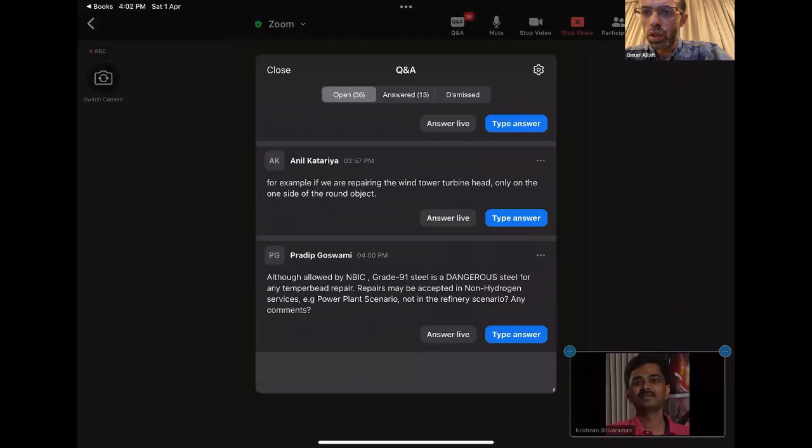So, although allowed by NBIC, grade 91 steel is dangerous for any temper bead repair. Repairs may be accepted in non-hydrogen service power plant scenarios, not in refinery scenarios. Any comments? I absolutely agree with you. The welding of P91 material is complicated and critical and very dangerous. So how about temper bead?

The new method, method 7 in NBIC, was recently added in the 2021 edition. There are a lot of ongoing studies just to explore the possibility of applying temper bead for P91 material, and how we can avoid the associated risks.

The main factor with P91 material is that, in most cases, in power plants, I'm not talking about refineries, it is operating at higher temperature, like above 550 or 525. So this will also help, it will be like something similar to normalizing or reducing the hardness of this material. You can use it with certain precautions.

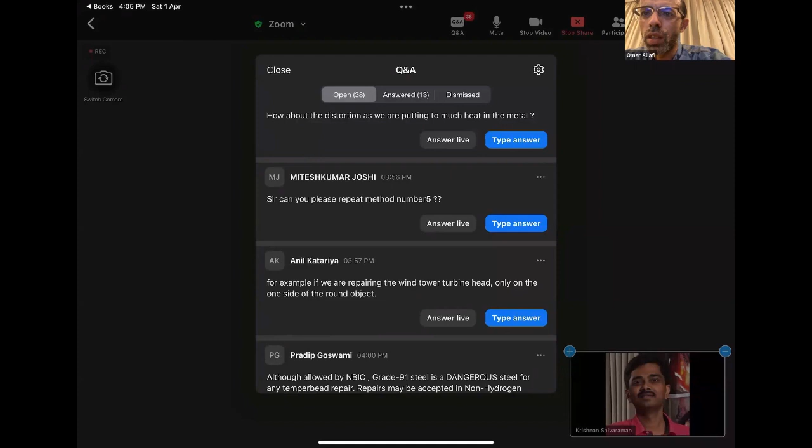How about distortion, as we are putting too much heat into the metal? Yes, distortion is expected. As I said, it's not that distortion will immediately create a crack, but it can result in high or coarsened grain. That's why for temper bead a new variable was developed, the heat input ratio. Controlling the heat input ratio between the weld runs ensures mechanical properties are within control, and no distortion to the weld metal or heat affected zone will occur.

Could you please repeat method number 5? Method number 5 is for dissimilar welding. In NBIC, he's referring to NBIC, yes. Method 5 in NBIC is for dissimilar welding, when you use low alloy steels.

When you have dissimilar welding between low alloy steels and austenitic stainless steel or nickel alloys, P42, P43, and P number 45, in this case they have a specification referring you to either method number 2, method number 3, or method number 4. So when impact toughness is required, you can satisfy the requirement of method number 5 in addition to the requirements in method number 2.

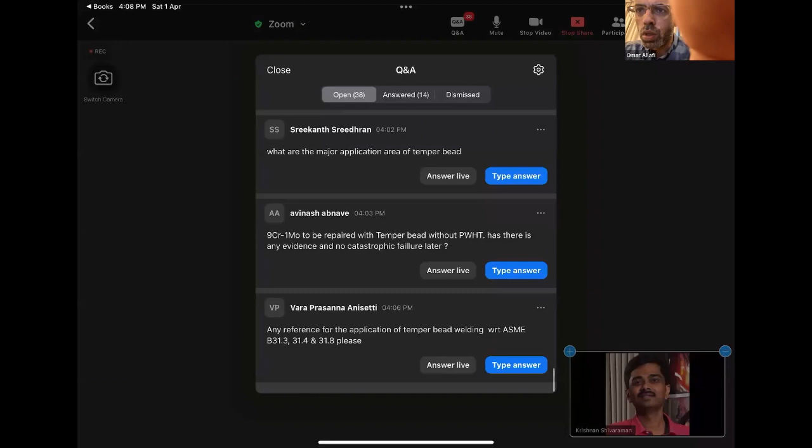I think I should start from the beginning. Okay. Ricardo Benedict asks: is temper bead cost effective?

It's difficult to answer simply. If you're fabricating a new vessel, why go for temper bead? You should go for PWHT. But if you want to do repair after PWHT, and multiple PWHT can degrade the material or degrade the tensile strength, then yes, you can use temper bead. But is it cost effective? I'm not sure, because it's different during fabrication versus during shutdown or turnaround. It's a very subjective thing, and we need case-by-case study to decide whether we can or should use it.

This is from Mitesh Kumar Joshi. Is PWHT area a high strain area? How to eliminate residual stresses?

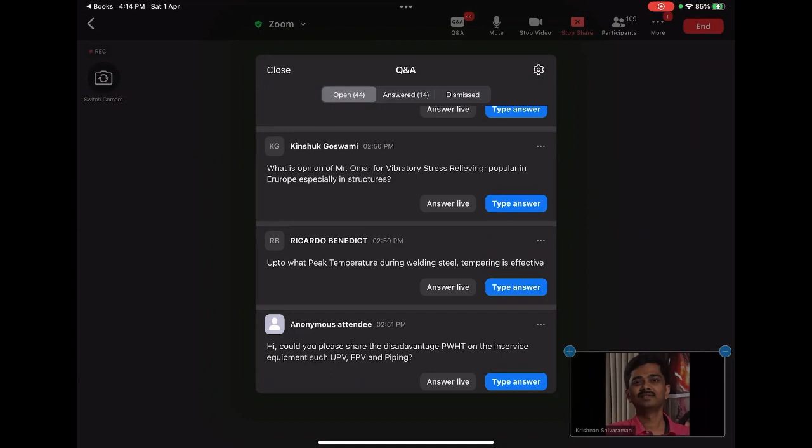Again, temper bead is not for stress relieving. Yes, it can result in lower stresses, but it will not relieve the stresses of the weld. That is not relevant to this topic. Yeah, yes.

What about peak temperature during welding steel? Tempering is effective, yes. As I said, after welding you will have different areas where the grain size can enlarge, or you will have fine grains, or you will have tempered grains. The fusion line, the coarse grain needs to be tempered similar to the subcritical zone, which doesn't go above AC1, this is the tempered zone of the base metal or heat affected zone. So the area in between needs to be tempered. This is how we control it: we're applying the beads to the previous weld in order to control the temperature and not expose the base metal or previous weld to a temperature higher than AC1.

Could you please share the disadvantages of in-service equipment, UPV and FPV piping?

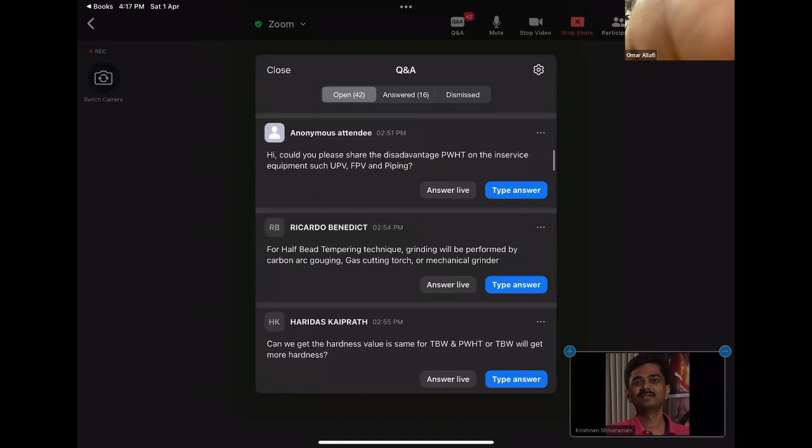For half bead, this is Ricardo Benedict again. For half bead tempering technique, grinding will be performed by carbon arc gouging, gas cutting torch, or mechanical grinder. Only mechanical grinder.

Can we get the hardness value same for temper bead and PWHT, or will temper bead get more hard? Okay, you can control this, and it can be lower. You can achieve the required values by temper bead. So this is about hardness. He's asking if we can get the same hardness similar to after PWHT. Yes, the answer is yes. You can get hardness values similar to PWHT.

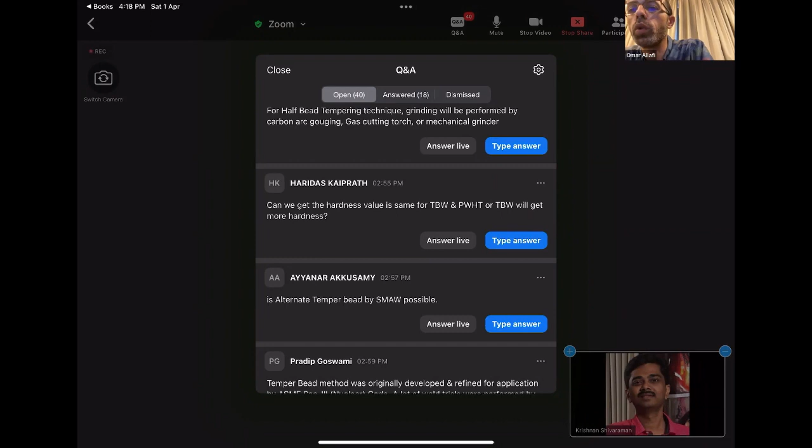Not only this, but toughness. In some studies done by EPRI, they claim that the toughness using temper bead, consistent layer temper bead, for P number 4 and P number 5 is better than the results after PWHT. So not only the hardness, but also the toughness.

Is alternate temper bead by SMAW possible? Yes, it is possible. The welding methods accepted are SMAW, SAW, GMAW, FCAW, GTAW, and PAW, automatic. I prefer automatic. Although when manual is to be used, you need this 6 months rule for the welders, and you need proficiency demonstration for the welders.

Pradip Goswami: temper bead method was originally developed and refined for application by ASME Section 3. A lot of weld trials were performed by Ontario Hydro. Half bead technique is considered to be the best method with respect to hardness control in the weld. Yes, you are right. This was developed by ASME Section 3. As I said, the concern with half bead is not the hardness, but it is difficult.

You are doing grinding and applying a second layer, and after grinding is also difficult because it will be ground smooth. You cannot apply, you cannot control, and it is time consuming by itself. So it's not the hardness, yes, this is the best method to control the hardness. This is why ASME Section 8 Division 1 till this date allows the use of half bead only, not full temper bead. Section 1 till 2021, they were allowing half bead, no full bead.

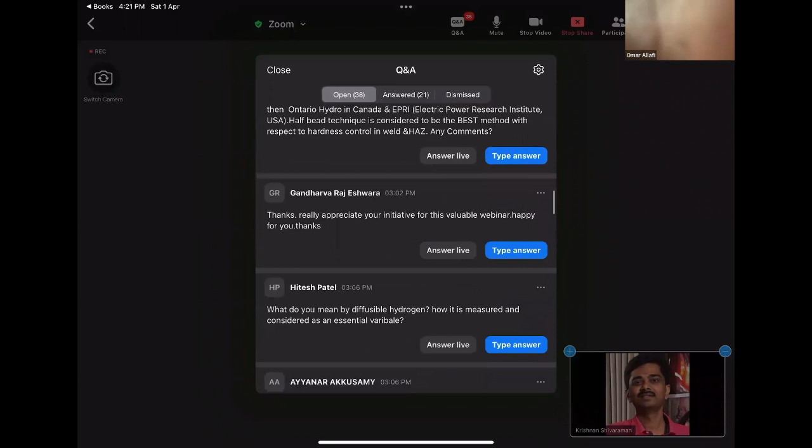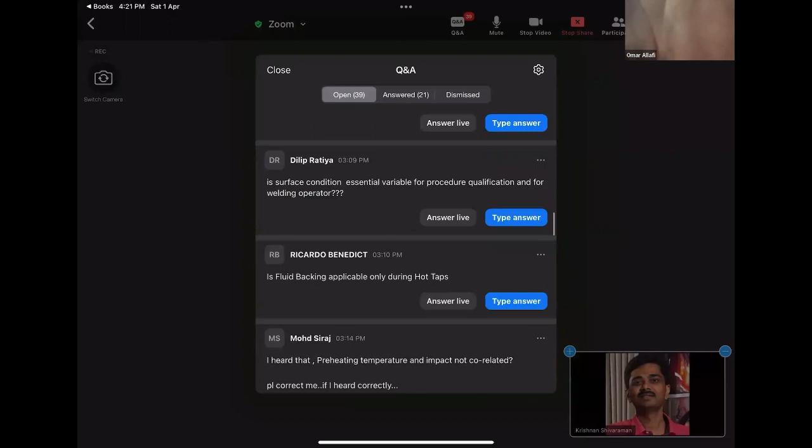Hitesh Patel: what do you mean by diffusible hydrogen? How is it measured and considered as an essential variable? Okay, I think you already covered that. Yeah, okay. Is surface condition an essential variable? I'm not sure if I'm taking too much time.

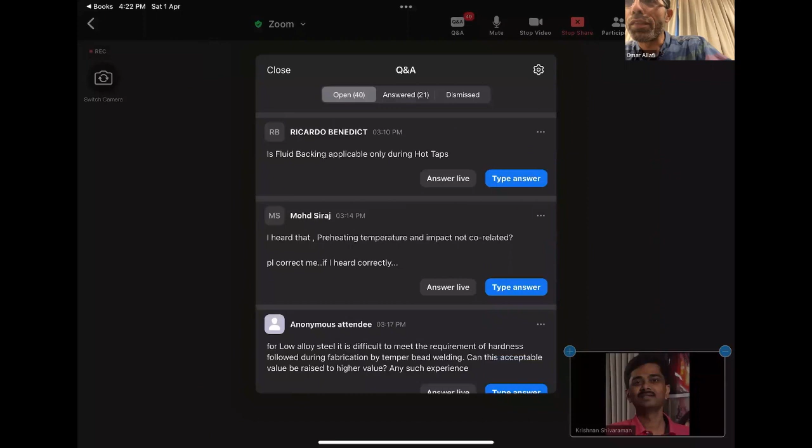I'm not sure about my time, and you didn't say how much time I have, but it seems that I took like 100 minutes, 1 hour 40 minutes. Yeah, the topic was so interesting. All were glued. Nimesh, you'd like?